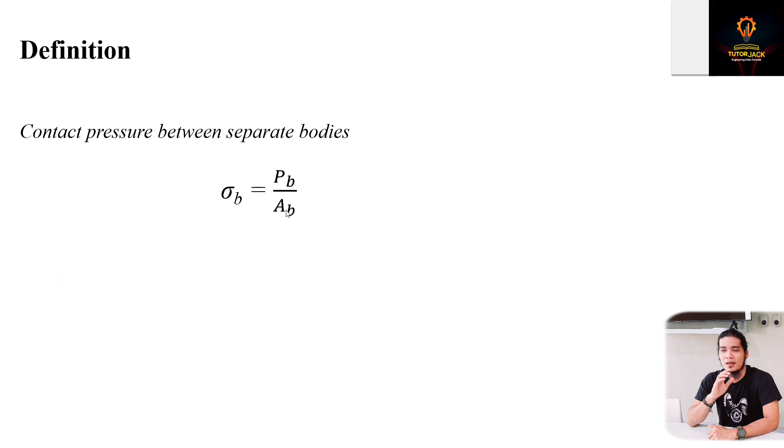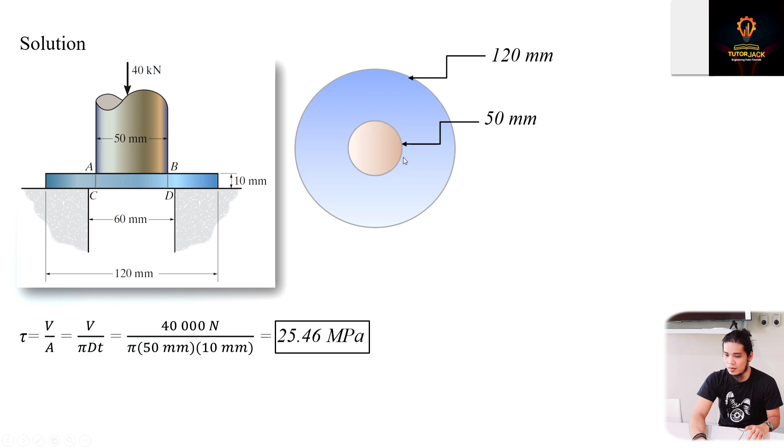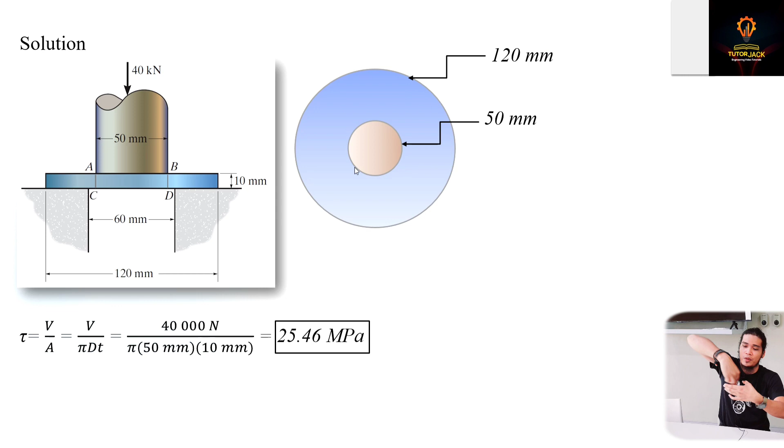So, divide lang 40,000 newtons divided by this value, pi 50 times 10. So, 50 na diameter times thickness. So, you will have 25.46 Newton per mm square or megapascals. Okay? So, ngayon, yung bearing capacity naman ng plate natin,